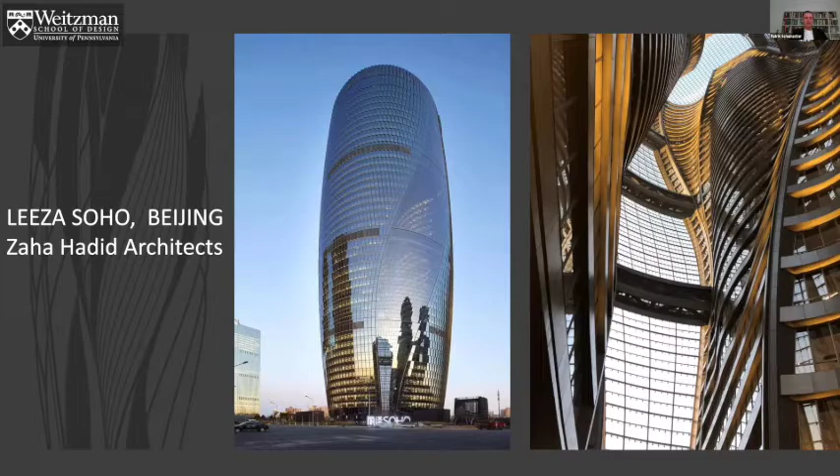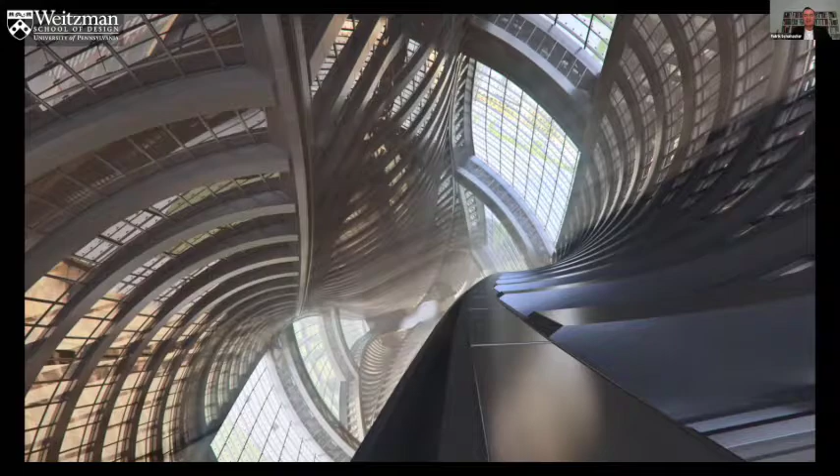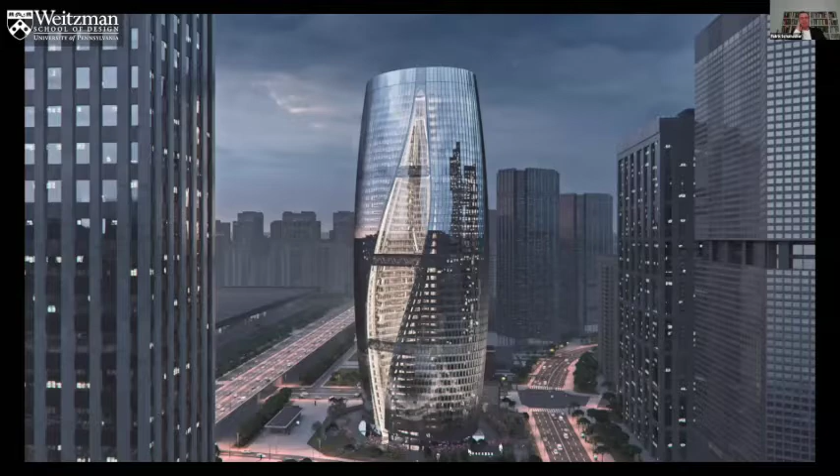So I start with this video, I hope that runs. Bit of music, I switched it off. Yeah, it is about that experience on the inside, and of course it's also deliciously made, and the way you get the anticipation of that interior space. So it is about an experience, about a social congregation which has an image and the phenomenology and the presence.

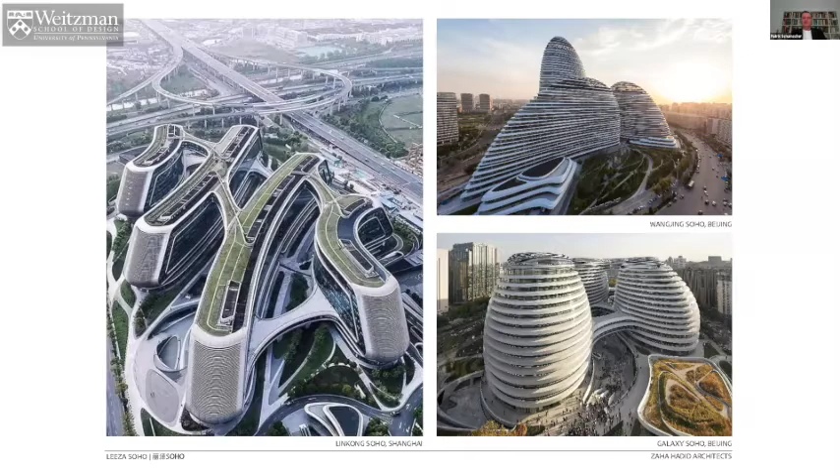And I will tell you how we got there. I mean, these are the 3 other projects we've done for Soho, 2 in Beijing and 1 in Shanghai as well. And some of the themes go through, to create a kind of large building, which is basically a cluster of multiple buildings connected with bridges and podiums. And with respect to Galaxy, maybe the best of the 3, you already get basically a series of atriums, actually 4 atriums on the inside, but you get the largest, the big one is that exterior, in inverted commas, atrium, which is also open to the urban space and has bridge connections.

So that already gives you an anticipation. Of course this, Leeza, is kind of 4 times as high or more, with 200 meters and another level. But we've built up a kind of brand identity also for Soho, and we've established a track record of delivering complex buildings, where we also use complex geometry to enhance the overall presence, and also the overall intervisibility and navigability and orientation capacity of these buildings.

I think that comes through here. So you can see these are already photos of the final product, and the way the light pours through, you can see right through the building, a series of bridges which we need structurally, but they also become connections.

The idea of the twist - it actually has to do with the cut, the cut in the underground where the railway is cutting through. The twist delivers a beautiful dynamic and also gives a kind of waveform into the facades, which would otherwise be flat. You get more tilting into view of some areas, and more view enhancement and intervisibility through this, as well as the beautiful plasticity of the object.

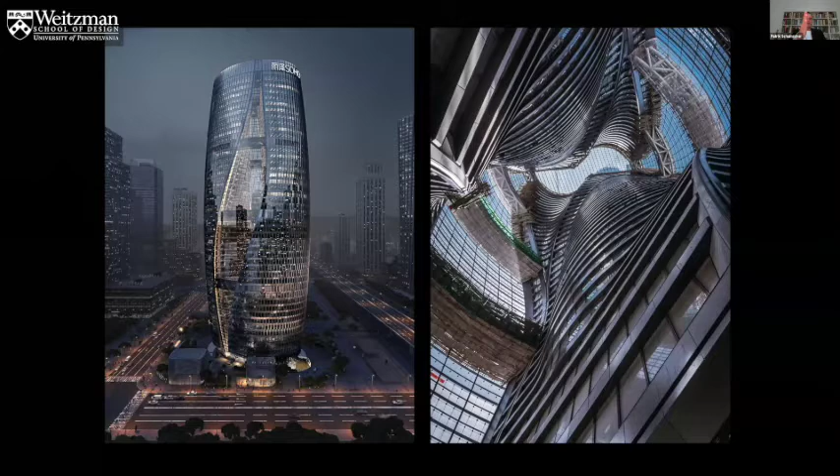To look for these monumental expansions of the object itself through context embedding.

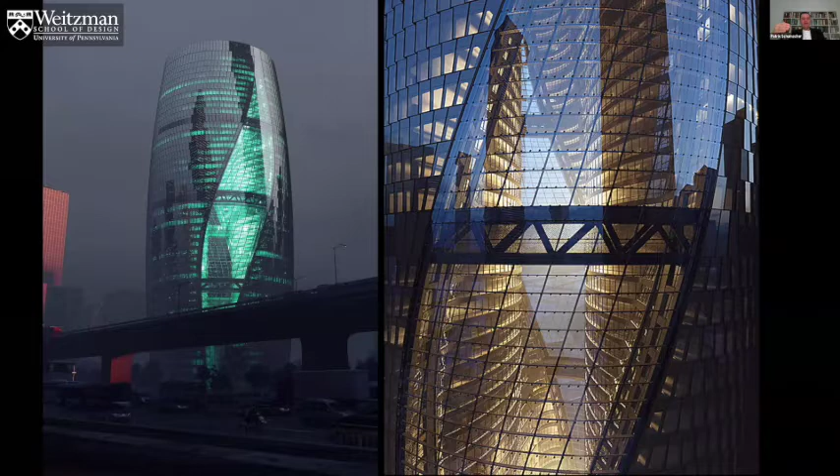I'm showing this also to demonstrate the way we design now - we have complete models, fully detailed BIM models, and then we can render photorealistically and really anticipate what we're getting. On the right hand side, this is a rendering, and if you later see the photos, it is nearly indistinguishable. That capacity to anticipate, knowing what you're doing and what you want to deliver, helps in homing in on various design decisions.

Sometimes renderings are dismissed as something just about selling, a commercial. No - rendering means you know what you're doing. Ali, you were the first one to push rendering to that extent within the discourse of architecture with your Nike Shanghai project. It was great because a lot of people took it as a built work, but you brought it home with a tangible sensation, knowing what you're doing with every detail, with surfaces, with reflection. In terms of the discourse of architecture, they can stand in and substitute for the real thing, if elsewhere you've demonstrated that this is actually feasible technologically.

Here there's a series of others - this is actually the photograph, and these are early sketch renderings, not the final. Anyway, the intentions were clear already in these. This kind of vortex space is amazing, with the light pouring in and the view, but then also on your own level, the open floors, the way they interface across, the way the tilts sometimes allow you to look at floors above you.

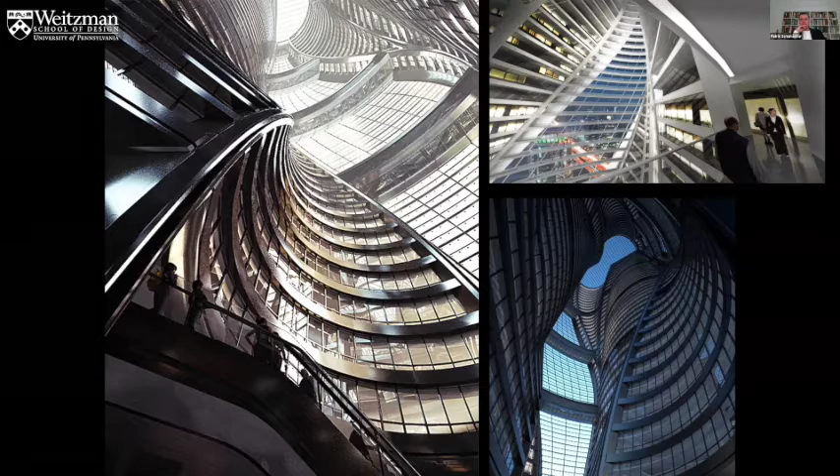Here we're getting into this kind of amazing play of light and shadow, the modulation, the plasticity. That's the way you get a visceral sense of the object you're entering, and that means orientation becomes clearer - it's not abstracted away into something. As you move, things pull into view and slip out of view. It's more dynamic, more - in parametrism I talk also about observer parameters - it's very sensitive to position. So the piece keeps shifting its character, revealing and concealing as you shift around it, and I think this is important.

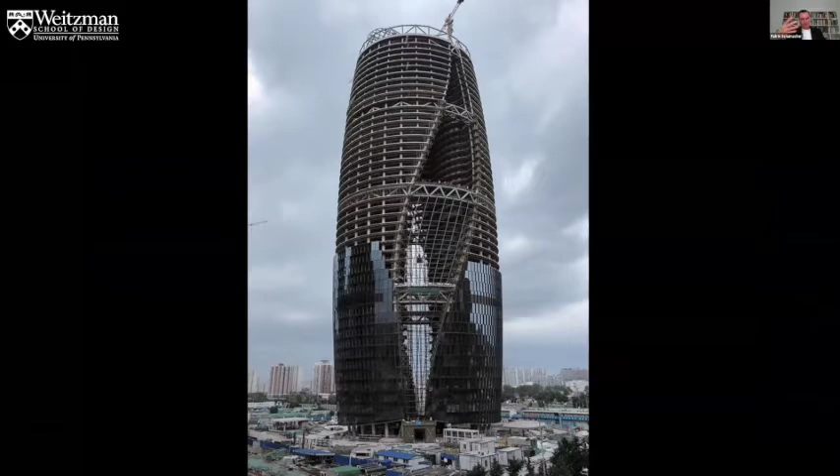Just to see how this, when it started to happen, the excitement of seeing those structures going up.

We'll talk later more about the facade. The facade is a kind of gradient transformation. It's actually a shingle facade, which gives this nice rhythm, but it also has the function of opening a mechanical vent point. Then it flattens out when it becomes a flat sheet of glass in front of the atrium, and then it thickens out again.

I noticed something you learn from - I was in Nanjing, SOM did this hotel where they had curves, and they went for the shingle solution. I realized the shingle solution also gives this nice translation from floor to floor. You use similar, close elements, with sliding on the verticals. Instead of an attempt to make a curve with a flat sheet, you get something more deliberate. The shingle means, yes, I want to be flat, but I'm in that kind of drift, and it's beautiful because it's different from different sides - you'll see later in the close-ups.

Very important that facades, in my view, have a relief oftentimes, and that they're sensitive to angles.

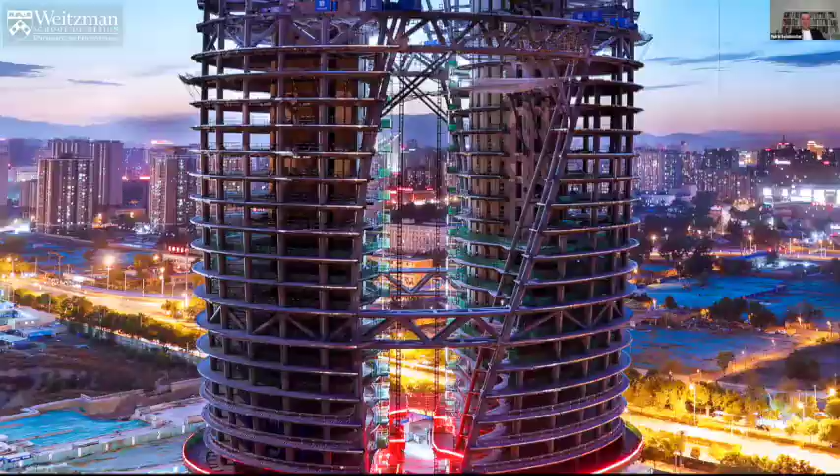So this was just when it comes to the pure space, the pure structure. These are two towers, so there is a core, and I've always been with DRL studying building towers without cores, with open panoramic elevators and so on. Here we do have a core, but usually the core is massive and would obscure the relations inside the building on each floor, and of course across floors.

You have no communication, no intervisibility, so you would disappear in an elevator, and then you have thousands of people in the building you're totally unaware of. You're just in your little cell down a corridor - you don't even know who else is on the floor. That is highly problematic in network society.

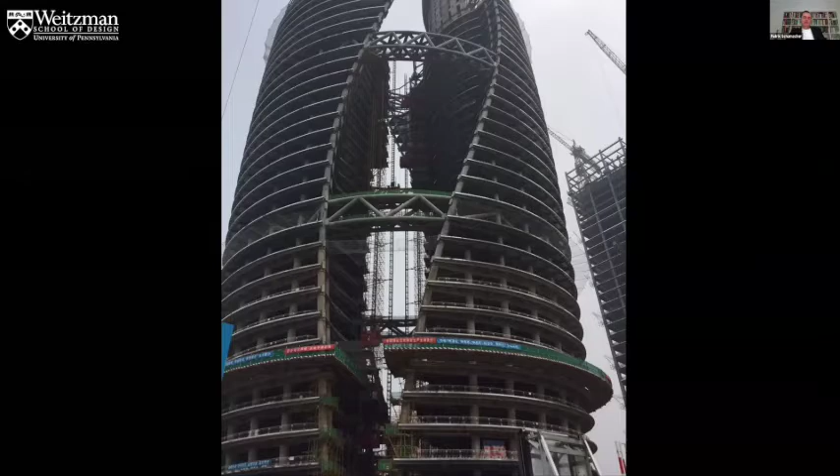It's also, why are you coming to the place in the first place? You might as well stay home. As we know now, joining in means literally you have to be part of something, a network. So that needs to be these spaces of gathering - it might be only visual, inter-awareness through intervisibility.

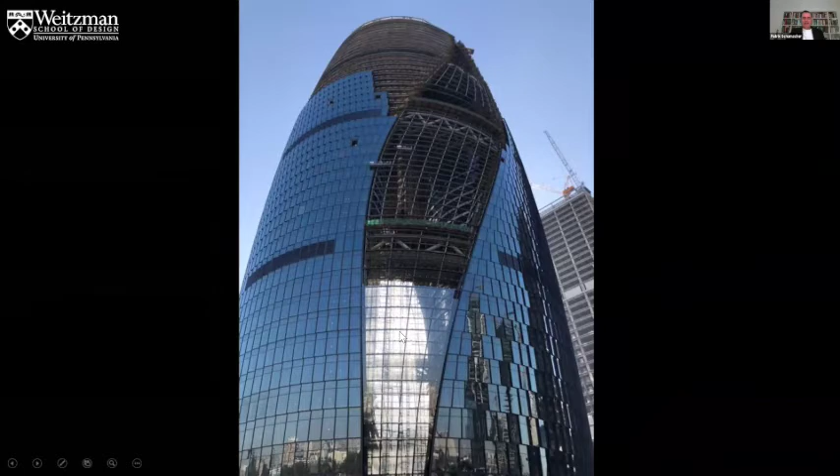Okay, so here you can see a little bit the way these large, flat, highly transparent facades start to transition into a little relief, and then it builds up the relief to the edge.

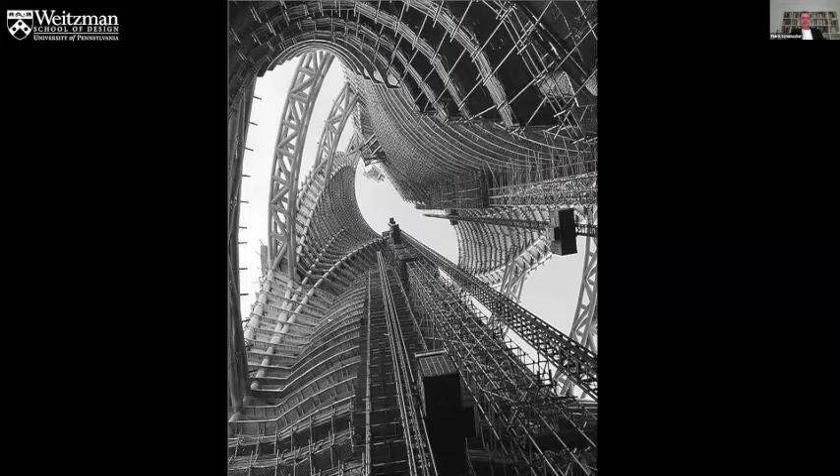And yeah, they're doing construction. So it's a thrill to pick up these images and see the thing coming up, and you see how the tower is 200 meters, and the two halves would be very fragile in terms of their proportions - that's where the bridges come in. I think the bridges are an interesting and nice feature, also if you move through them and experience the space.

There's been issues in terms of what one would have wanted - issues in terms of security and fire, which we're still working on for mega atriums, in terms of sealing this, in terms of allowing some of the more open spaces into that space. I wanted to pull back the facade on a lot of floors, so you can step out or circulate in the atrium.

And I can understand - I've been in high places, and particularly something delicious like this, which is otherworldly, that you might not even be depressive. You might just do it.

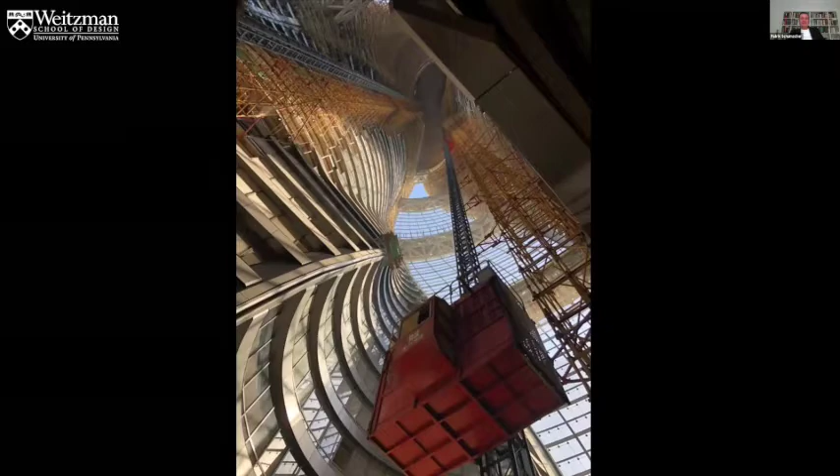Anyway, so here we are. I wanted to go a bit more into the location in Beijing. The Beijingers know obviously where it is and what it is. It's actually en route to the airport. It's beautiful that it's connected to our airport.

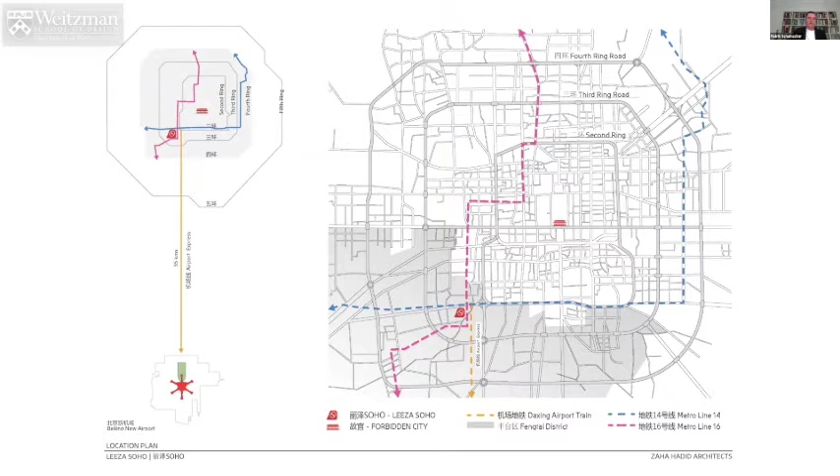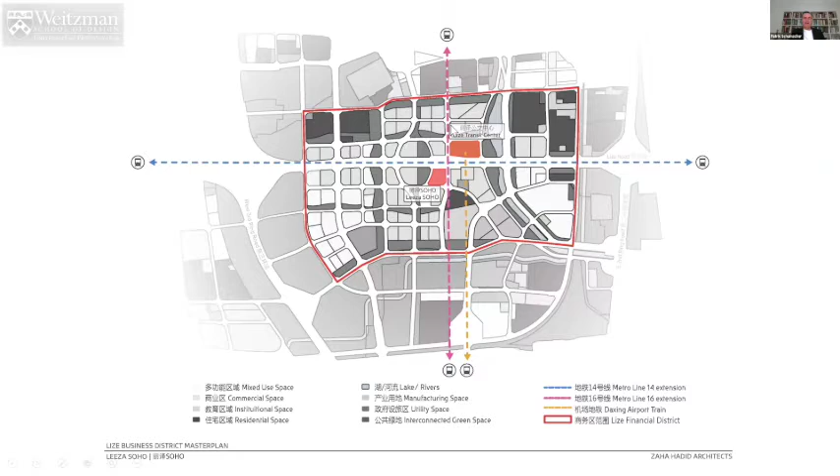We've been competing for that check-in. You take the trains, it's the intersection of two train lines, and you drive here and check in, then the Daxing airport already, and you take the airport express from there. So it's a direct connection with the airport, the intersection of these two train lines, and that matters for the idea of the project.

So I wanted the mega atrium anyway. I had talked to Zhang Xin, the owner of Soho, when we did some of the other projects which have atria, in particular Galaxy. And as I said, I was with John Portman, and he actually came to our review at the GSD. So I was developing the idea of the mega atrium, and I wanted to do it, and Zhang Xin knew about it, and I got her hooked on that.

But then we had the additional thing that the train would cut through here, and we actually can't have the core in the center anyway. Now we're doing a lot of towers with off-center cores, for instance the new Hong Kong tower and some others, and then you could have the whole core off-center and get a big floor plate. But we used it here to say, okay, we split the core and set up the atrium. So that's a motivator - I would have done a mega atrium anyway, but this was a good motivator also for her to see we have to split the core anyway.

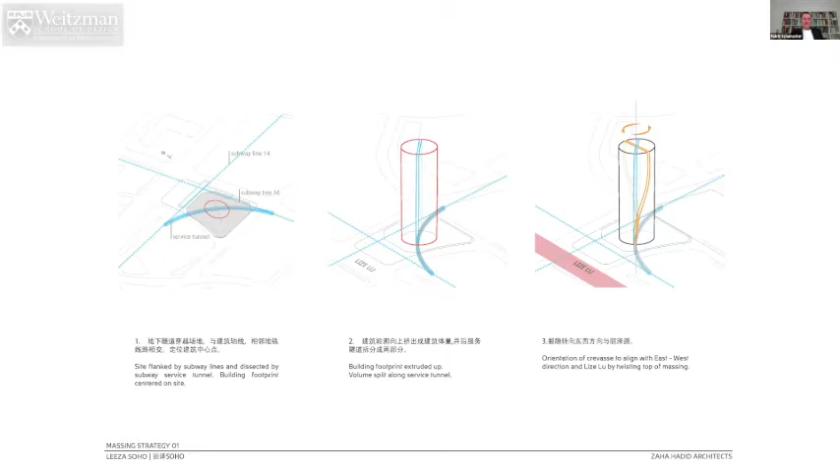Let's twist the whole building, and then you can see that the direction of the atrium changes to align with the urban grid. So there is rationality in that, from diagonal to alignment, and then you get these beautiful surfaces, and also the idea of opening that window.

Now the building is very complex. It's not a cylinder, it's not even that the footprint is a circle - it's an oval, it stretches into an ellipsoid, which then as you go up, the elevation is also changing, swelling up. That's why the window can also open up more, and you get deeper space, and then it kind of closes in a bit more again at the top.

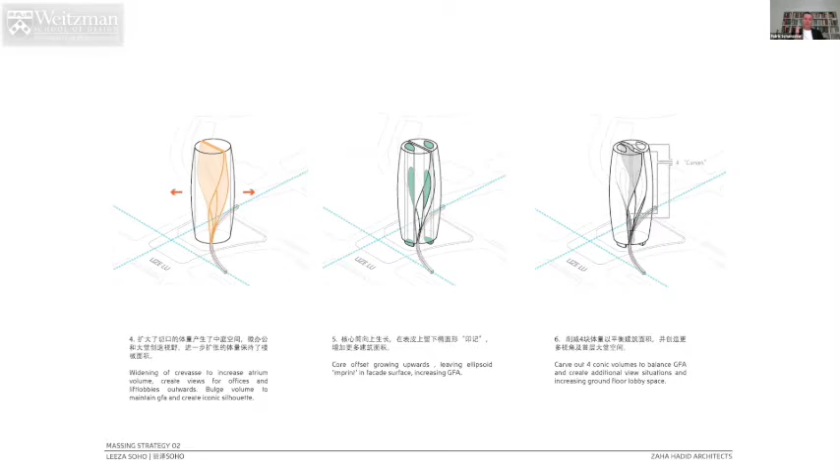So it is highly complex, and in the end every panel is unique. There's no repetition - I mean there's self-similarity, but no repetition in this, because each floor is different. And as you go around, swing around, you have this modulation of the relief from flat to quite deeply projected.

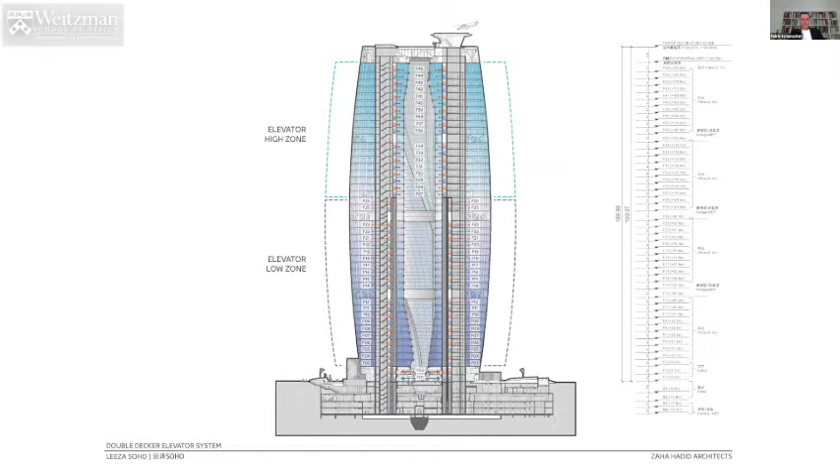Some of the programming - we have a sunken retail condition, so there's also an interesting relationship with the ground, going negative. And at the top we have a helipad, so some kind of communication coming in from the top, similar to Miami Tower where we have that. And you can see it goes quite down with escalators, connecting with retail into the train levels. So it's a real TOD kind of central node.

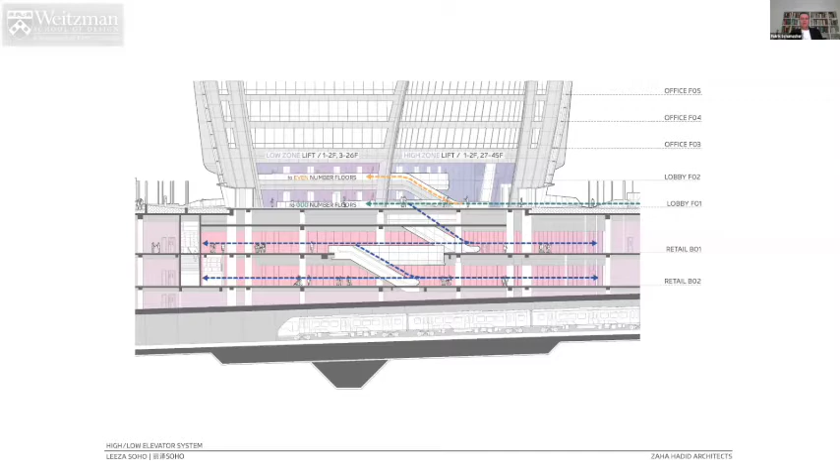There's a whole finance cluster now building around that, so it's a fulcrum of a whole new business district at that intersection, connecting up with the airport in the south of Beijing. Here you can see some of these sunken plaza conditions, landscaping, the skylight, the sheared atrium, the helipad, and some solar.

And it's beautiful - we don't see anything of this sticking out. A lot of times this equipment and so on is plugged on towers, and the image suddenly gets out of hand for the architect, and something else takes over. We could avoid that here because we have energy centers and plant floors, and we don't pack it up on the top of the floor, where there's always a pretense of being able to hide it, and it usually never can.

So this is where that ground floor space is very, very generous and open, with a series of escalators up and down, etc., and the two cores. You see that as the building swells, you get a lot more area behind the core and in front, so you get more generous floor plates.

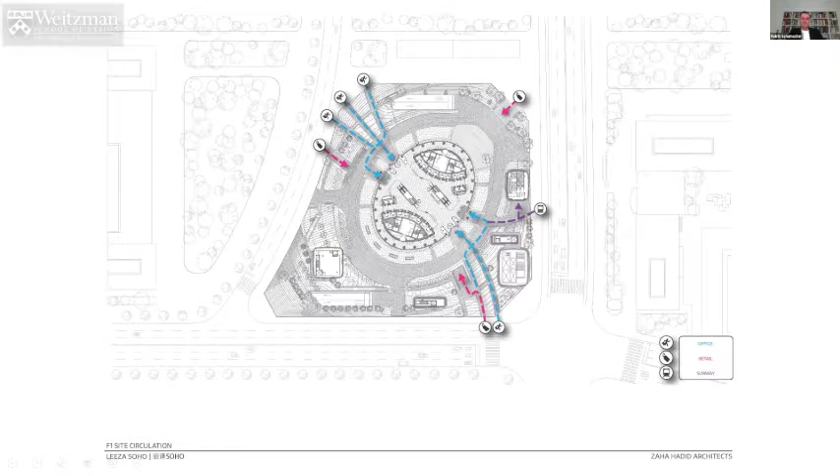Anyway, I don't want to go too long on these, so let's get more into the details we've developed.

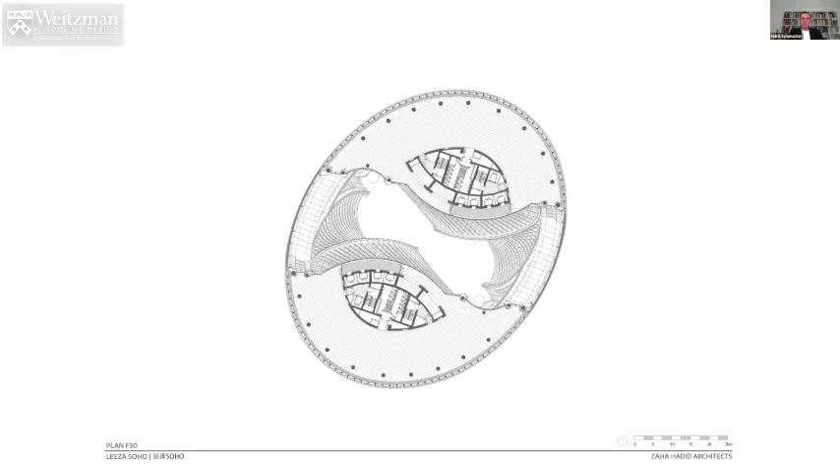There's always going to be some which want to be a little bit more separated off, but it's mostly open office. So I think it's a very lovely floor plate. Usually towers have the most boring floor plates, but here you see all this beautiful complexity in the form.

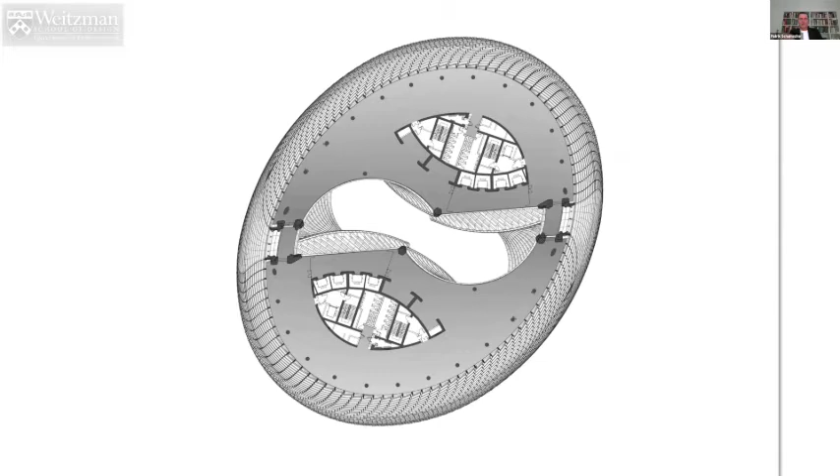And the changing depths—you can have something quite deep and large here, etc. So that variation is a nice default, and it gives various places for the various segments of an organization or firm to settle in, rather than having just one donut where everything is the same.

And so you see here, this is all kind of fully modeled and laid out and played out and visualized in terms of the open office plan and the vistas across.

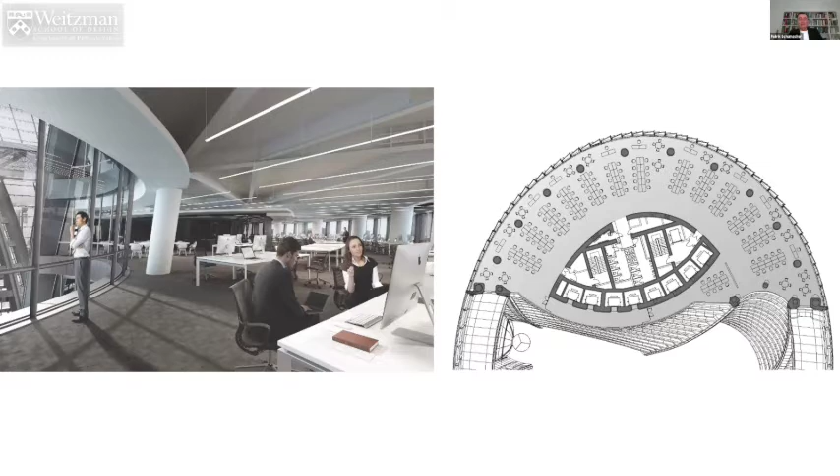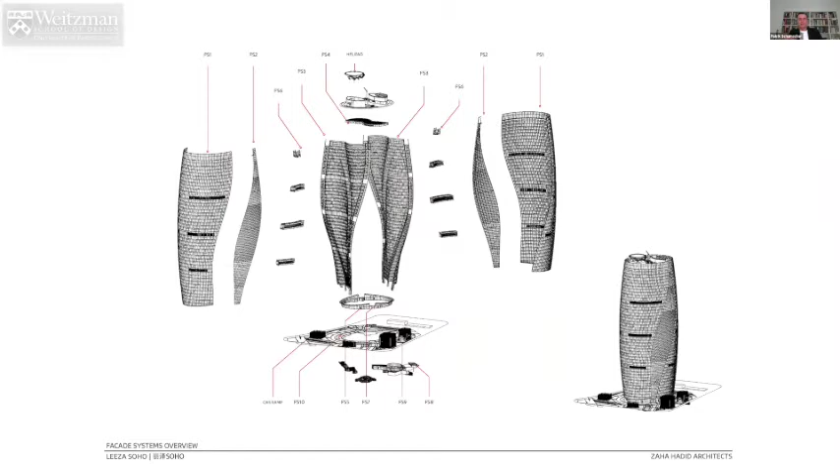Knowing what we're doing, the client demands certainty—they demand construction cost certainty and time certainty. For anybody to buy into this and dare going with this, they must trust the organization and trust the technical capacity which can handle these issues. And that's what we're doing.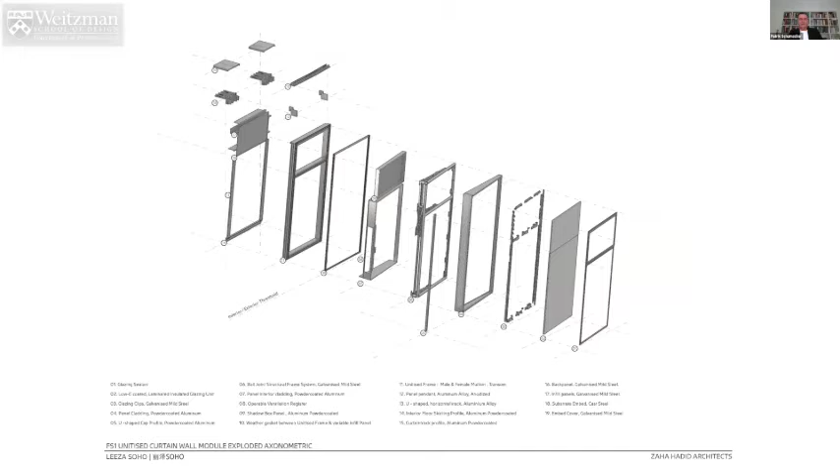These are the big kind of unitary systems, the big cassettes—you see the depth of the shingle, and each item is understood. This is the generative components, power detailing, where you map it out and develop the parametric piece and the way the element adjusts to the various locations.

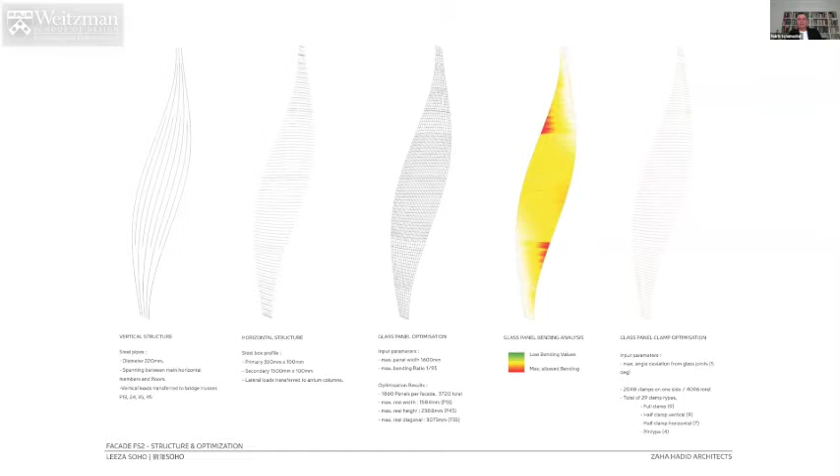And in the end, it all fits perfectly. It is a logistical and technical feat, which before these kind of computational processes would be a hundredfold explosion of cost—simply undoable. And now it is doable.

As you know, Soho China is not the client working for the big corporates—it's not the kind of budget Foster has for Apple, way far away from that. This is really budgetary-wise competitive, because it's for the smaller companies who don't have that luxury. I think it's also important to realize that.

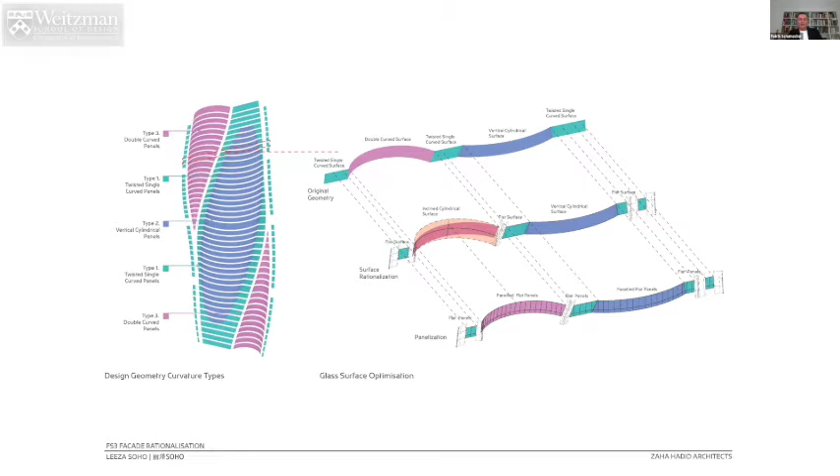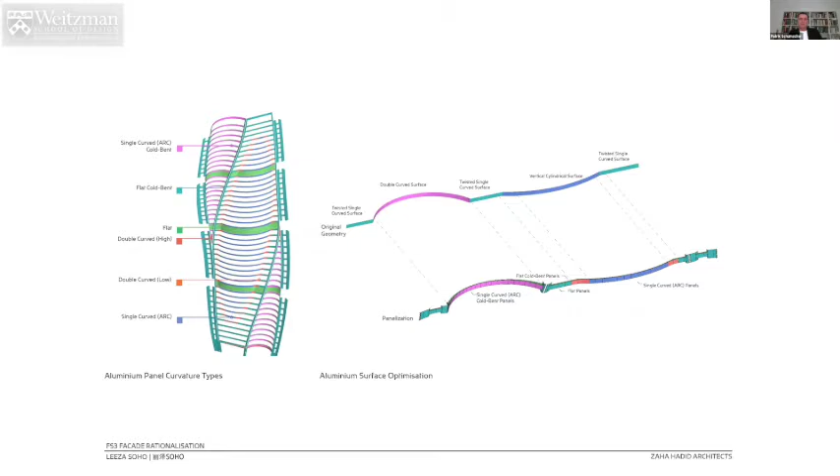So there's a lot of rationalization, a lot of tough negotiations, also with suppliers, competitive bids, and competitive creation of mock-ups. So here we get the engineering coming in for the plates, for the bridges, for the cores, and so on.

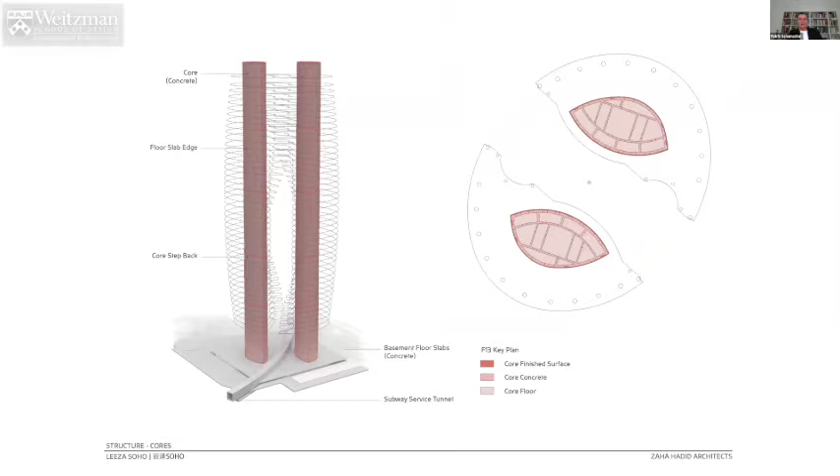This is the cores—in itself, some of these diagrams and forms are beautiful. You'll never see them; they're not articulated or made prominent, but it's there.

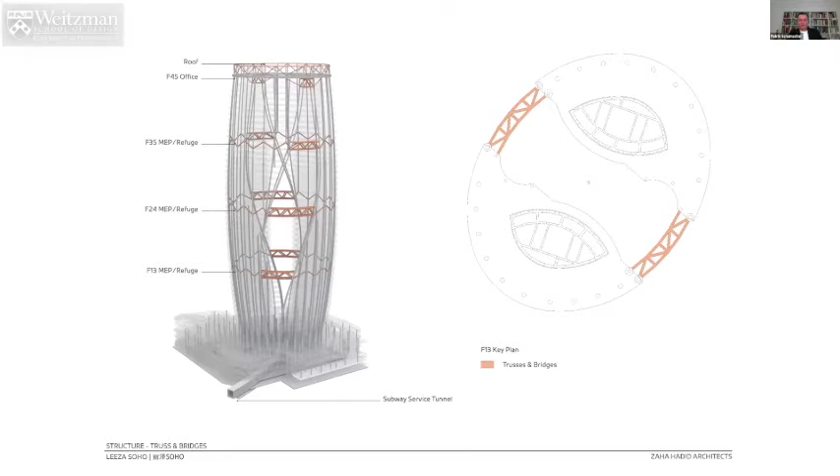And I always say we need to care about this. We can't allow behind the facade a kind of structural wild goose chase of forces and hatchet jobs, because in the end it will come through one way or another and will spoil the feeling. I even believe in the beauty of artifacts during construction, because that gives the anticipation and keeps the motivation going.

And then there's of course the integration of services. So important, in particular in fast track—we had so many projects in China where this isn't integrated early enough, where suddenly structural beams come down and you have to box around them, or redo all your surfaces late in the game, or M&E all over the place. We had another project which in the end eats up all the profit.

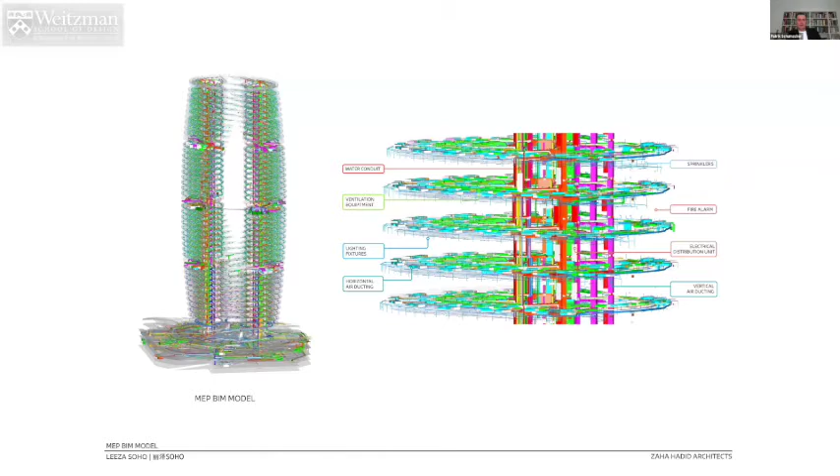So early integration, to insist on that, is incredibly important. That's also why we had our LDI engineering group lined up from previous projects as well.

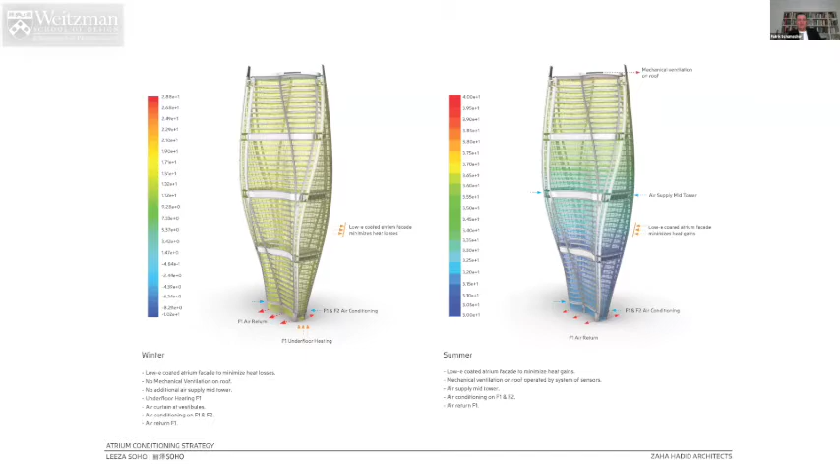Each segment, I mean, it's a complex object, is beautiful in a way, and I think that's important. Everything is in a kind of Grasshopper definition, all the steel works, and then the integration of everything.

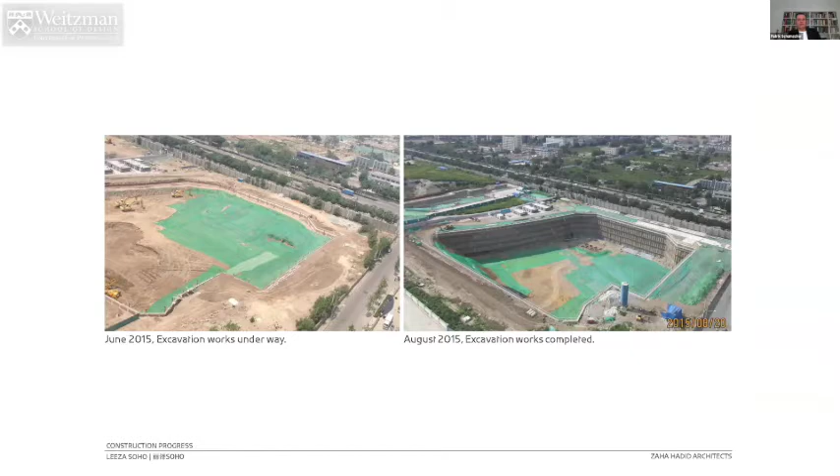So before construction we did some of these mock-ups, to see the transparency, to see some of the relief. I mean, this is not final—the shifts, it looked more beautiful in the final version than this, and the black color. Now this was another struggle I had.

I wanted Wangjing already to have black, gray, and white, or silver, gray, and black, and there's something about black where the client initially was resisting it. It took a lot of arm twisting and creating samples and associations and showing the potential beauty of black, and the elegance of a black building, inside and outside black. There was an enormous amount of resistance—more the scare that it might not sell.

I thought it was very important for this piece to not be another white metal, and you can see later that it works. It unifies the glass with the aluminum into something much more subtle, because glass mostly appears black anyway, where there's space behind it, and then you do the lace of lines.

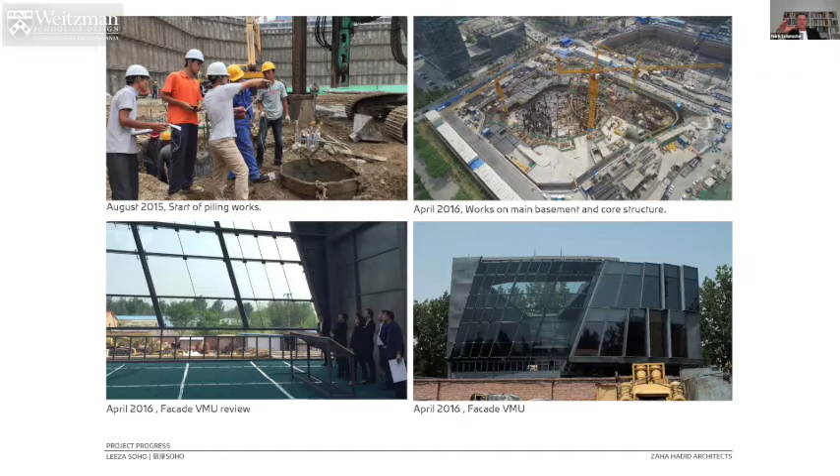Even if you have this kind of atrium from the outside, I've seen it too many times where we got frustrated. We didn't do, for instance, black mullions at the aquatic center, and the grid becomes too strong. From the inside, anyway, even a white profile would appear black. So it was an important aspect for a number of clients, an important aspect of this building, also differentiated against our previous works.

We have these two white buildings in Beijing. In Shanghai, we went for more kind of silver and gray. But we made the mistake in Shanghai that we had the curtain wall flattened and didn't express the mullion, and that lacks subtleness—the observer parameters are not activated. There's no relief, so I insisted here on the relief.

But it's very interesting the way how slick the building is, how polished it appears in some views, and how kind of feathered or ripped it looks from others.

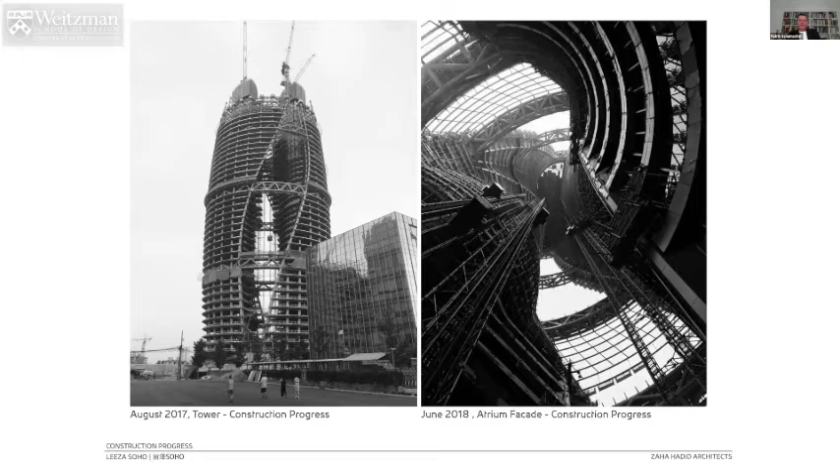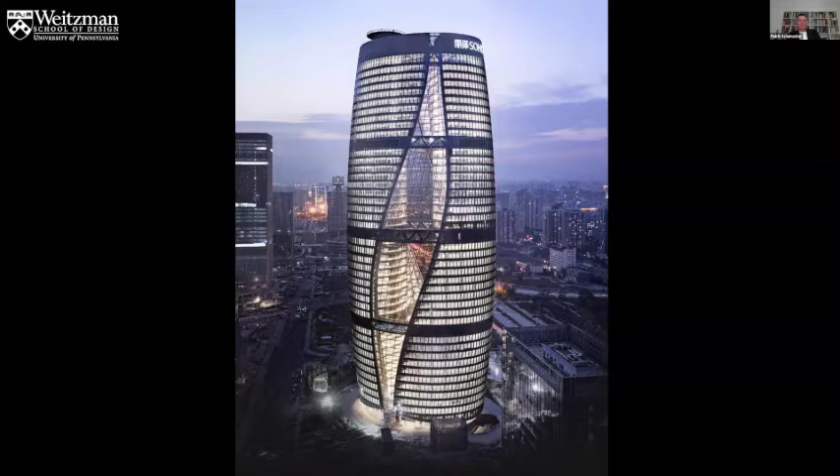Sometimes you get this beautiful kind of transparency, particularly from a mid-level helicopter shot, from another building, as the buildings around it build up. There's intervisibility between the two halves of the building and the next set of buildings. You can see where the party is going on, and you just move across the road or across the plaza and join. So these kind of views are quite fabulous.

Sometimes you get a lot of this play of reflection and the kind of migration of the shingles. I think it's very beautiful, more of a subtle surface—it's a delicious sensation, the way the light comes through these kind of dawn and dusk, twilight light conditions, which are often quite interesting. The building lives through the different conditions of a day.

These are some of the shots I created, so you don't need to be an expert photographer—this is what you perceive, this is what you get when you approach. These are shots I did myself with my iPhone. It's lovely the way the buildings behind reflect, and it's very important that you get these shots right through. Were there another building, you would have it here.

But also the transparency comes through, of course only where the two openings align with your view. And again, that's not a boring breach—it's a kind of twist that helps keep migrating that, let's say, through-shot, visual through-shot.

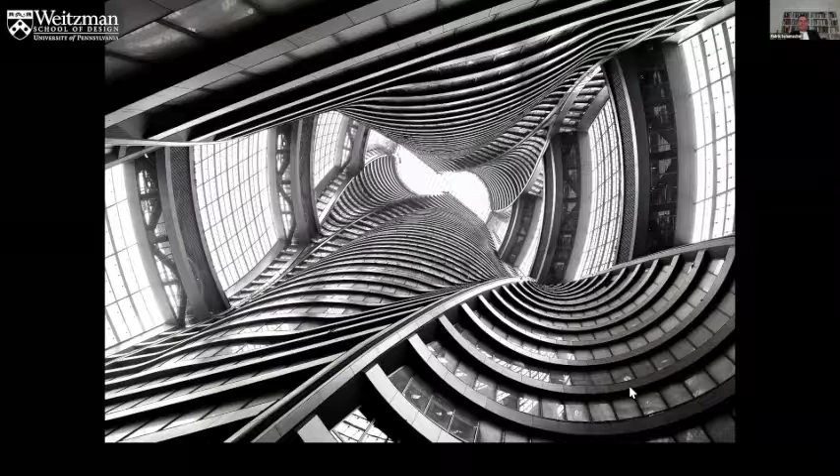And again, there's a few more views of this. This is an amazing shot. This is a kind of early evening looking-up photo. It's so beautiful, it's so thrilling. That is what you get, let's say, when you're the last one to leave at kind of 9 o'clock or something.

And to do that kind of space for a commercial working horse building, that's important. That is not something you need to only do twice a year, the opera experience or something where you kind of step out. This is kind of daily life thrills, a lot of visitors coming to your place, coming to your office and inviting you into that experience.

I think that's just uplifting, thrilling, energizing. That's important, I think, for the working environment, for the everyday. The everyday becomes kind of uplifted. It's a pleasure to go to work.

And of course, if we do the interiors of these offices and some of the lobbies and so on, you get that sense, you get this visceral sense of being part of the future and working for the future. And that's what a lot of these companies are doing, imagining the future.

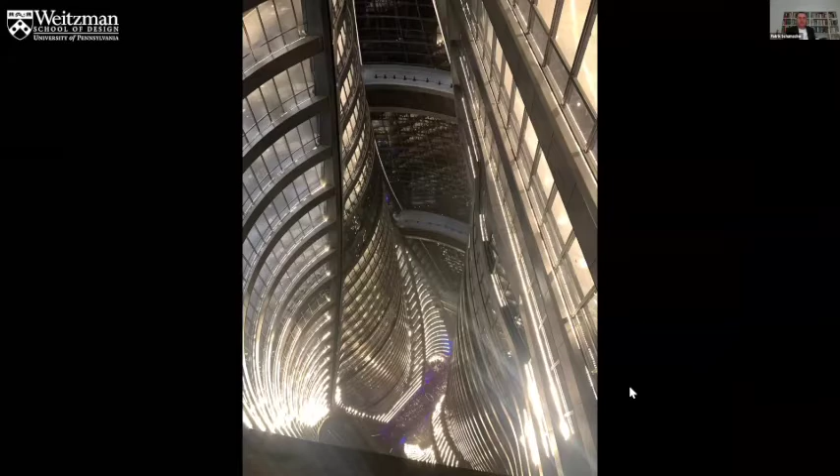And this is some of my own kind of shots again, and the way you look across the floors from one side to another, and when you look down from your floor to other floors into the urban. So my shots, and this is one of the interiors we generated with the so-called 4G Lab, and it's actually an exhibition of new media conditions. And I can imagine hundreds of different and hopefully congenial 21st century interiors which you can experience in such a building.

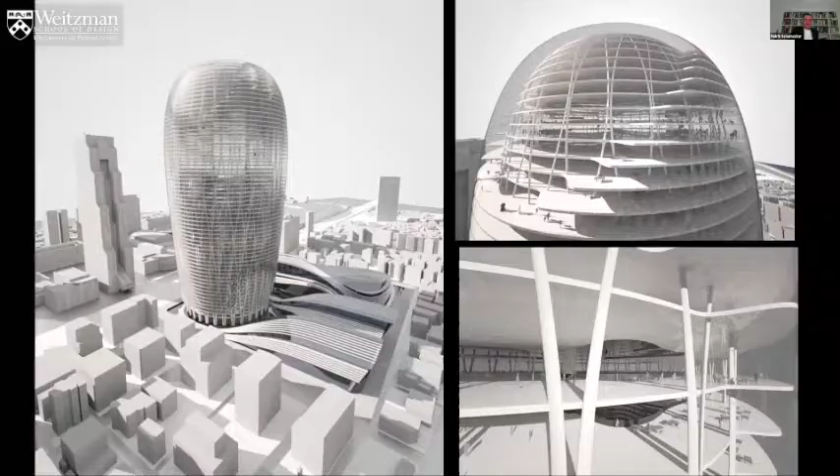So I'll just leave you again with that little film. And I wanted to, so that's Leeza. I just wanted to contextualize it a little bit, if you let me, Ali.

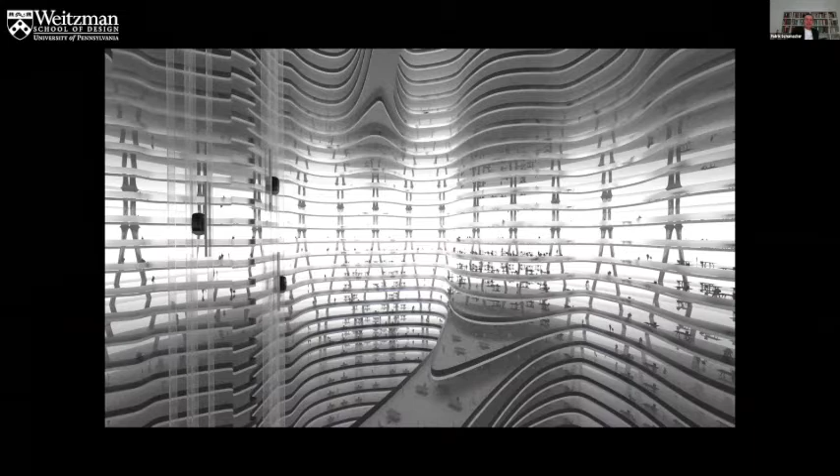Okay, sure. Because that's just the beginning for me of the mega atrium story. I've shown these around, these are bigger visions of something like that. That is a sketch for a huge kind of building, a headquarters building for Hyundai. And headquarters, of course, is another one, more integrated than you would have with the cluster of independent companies. So these are some of the visions we generated for other competitions.

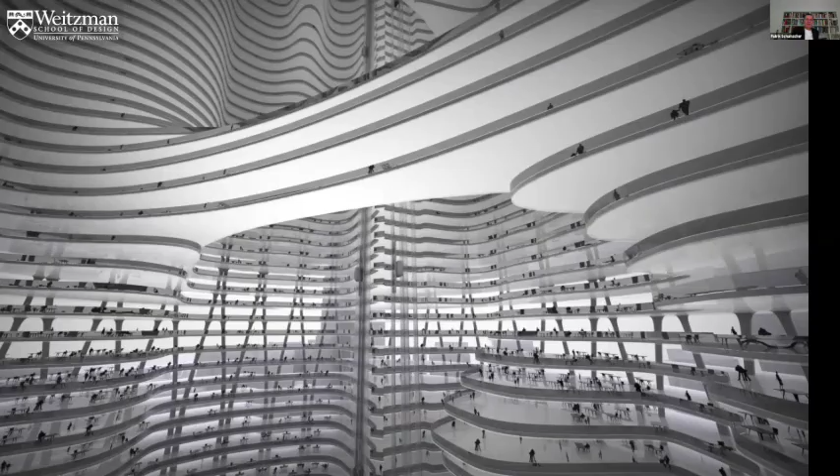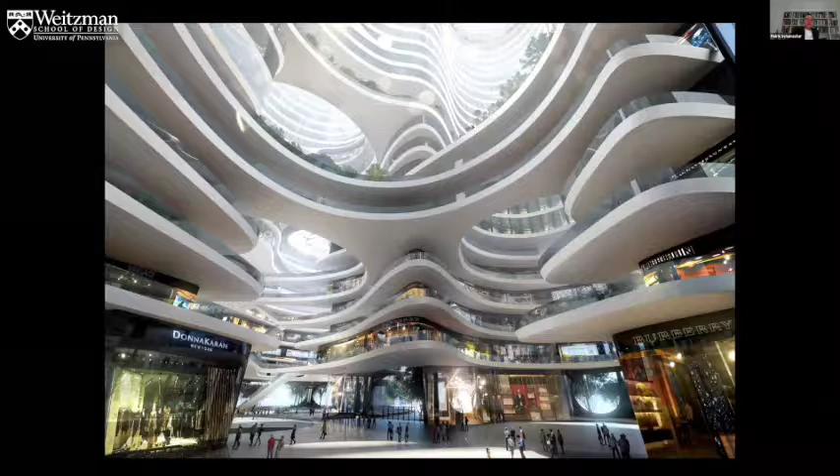We then went on to Taikang to propose something, which is another different version, more exteriorized, the atrium. But we've done other versions of this kind of world with mixed use and multi-use, with retail, hotel, and offices.

So finally, these were competitions, and this is the next one we're actually doing. It's not so much the mega atrium, it's a cluster of towers. There's transparency, but there is big atrium carve-outs as well. And if you don't go 200 meters, but only go, let's say, 40, 50, or 60 meters, then you also have less scare factor and fire issues, and you actually can do it.

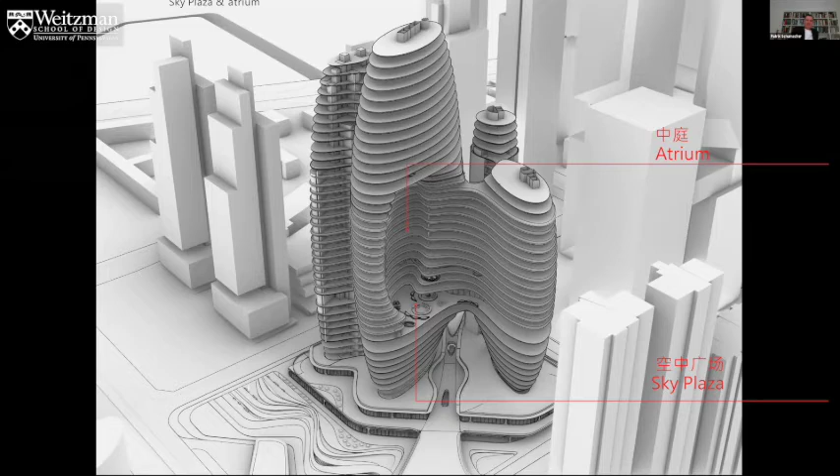So that's what we're doing right now for Oppo in Shenzhen. And here we're going actually with literally being in the atrium openly. You'll see how this pans out, if that can be done. But that's what we're doing, we're in SD with that already.

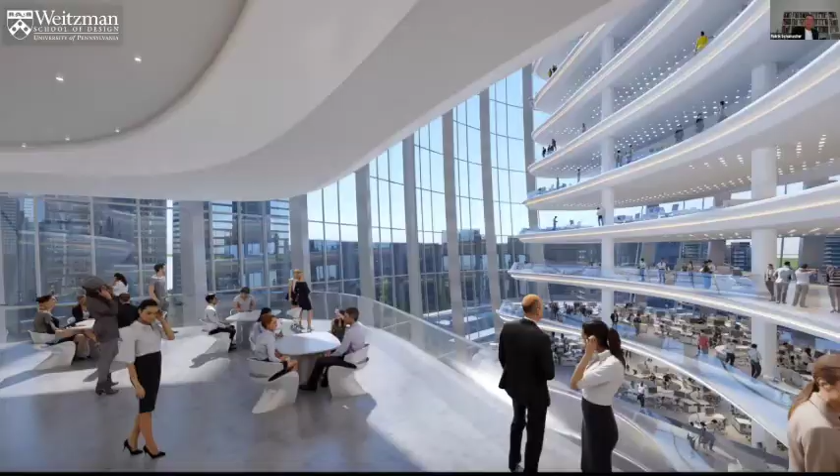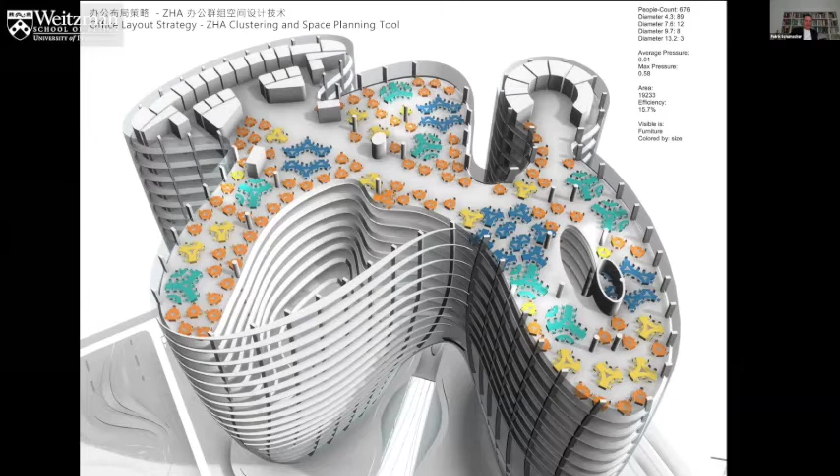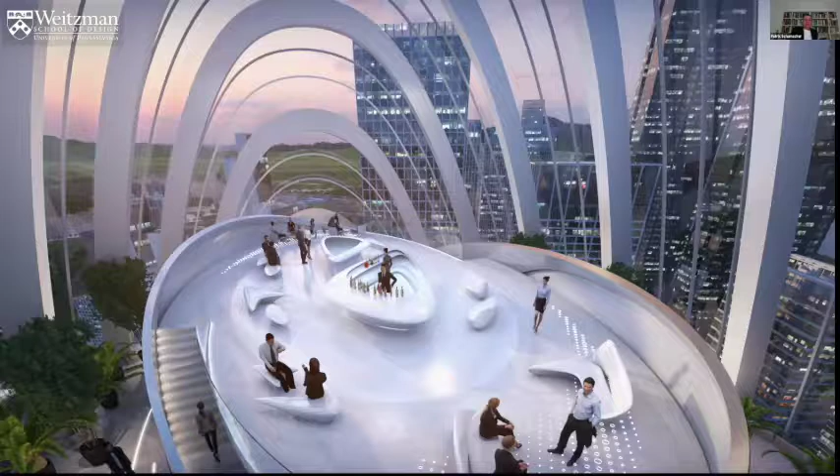And open floor plans with a series of smaller atriums, but still you can see here with pulling it to the facade, you get that fantastic vista into the urban, which is different from having it only from one floor where you have to kind of move your nose to the facade to have it. Here you can be in a space and see that, with some fantastic top of tower.

So it's not the end of a story, it's the beginning, I think, of a new crop of high-rise buildings, which have learned a lot from the kind of things we've done closer to ground-level spaces, because I believe that working spaces become more like cultural spaces. They're about networking, interaction, having meetings and events rather than putting your head down in a cell. So it's a new crop of towers.

It's a kind of Portman 2.0, because it's not only hotel, it's gonna be, and we have a few others in the works right now which I can show you. So these are the themes we're working on, and as you know, we're also working on structure. The next thing would be how these become more expressive structure, together with this even more integrated in these buildings. So they're far from the final apotheosis. They're part of a pathway into something I'm still thrilled by. Topping up, there's always another level. So that's what we're working on.

Patrik, that's fantastic. Thank you very much for that, for the talk. And I really... so that was what I had to say, Ali.